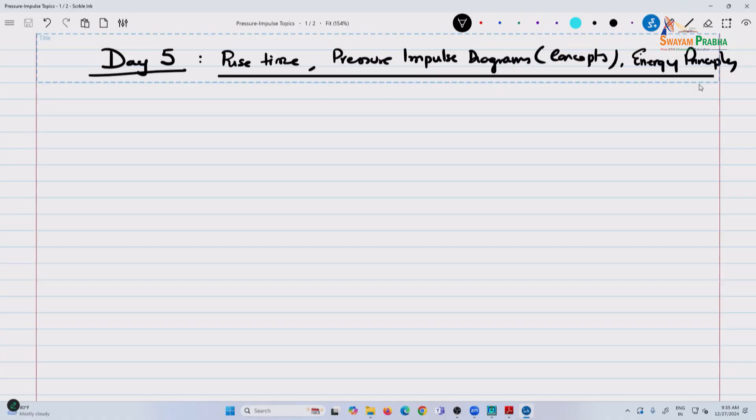Okay, goes by pretty quick. So we have a lot of different topics today. I put a few things, but there's nice concepts, some analytical work, things of that nature we'll present. The analysis varies from basic to all the way complex, and we'll cover all the spectrum, including calculations you have done, those are numerical. The differentiation between analytical, numerical, and advanced numerical - hand calculations numerical versus advanced numerical, finite elements. So all of that we will get exposed to, and today we'll look at some analytical information as well.

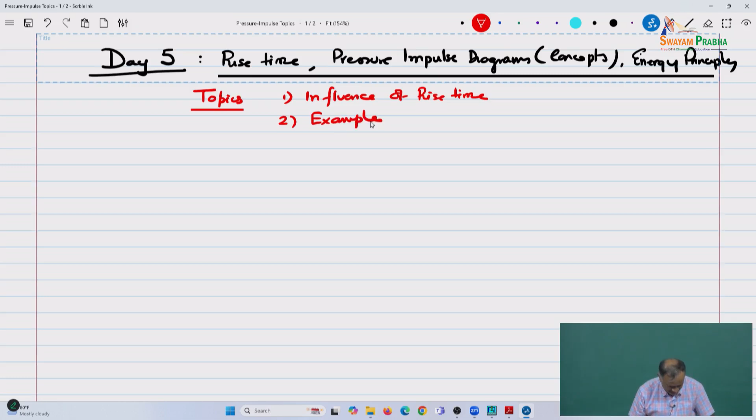Main topics planned today: the influence of rise time - I thought I had a graphic but don't seem to have that. Then we'll take up an example, and then we'll get into pressure impulse concepts and diagram. And also these are, I'd say, not energy, but sort of the Rayleigh-Ritz principles, impulse momentum Rayleigh-Ritz principles.

And then time permitting, we will look into nonlinear material aspects. So the plan is, hopefully we get through a lot of the basics today and Monday, the first session. Then we'll spend a couple of days on the analysis aspects of structures - how do you apply all of this to a real structure, elements. Then we'll cover the design aspects, the reverse - if you're given a certain loading, how do you come up with design, the design principles. And then we'll look into advanced concepts like progressive collapse, which I want to spend at least a session or two on, because it gives you an idea of what you do irrespective of the loading - there are ways to strengthen structures, design structures for that. And there's a lot of questions you've been asking, so I'm preparing some additional material, was preparing some last night. I have some more, so depending on how time goes, we'll address that later. So that's sort of the plan.

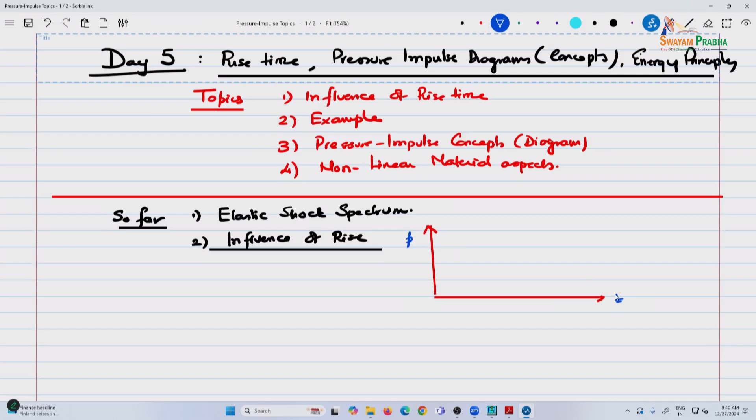Let's now look at the influence of the rise time. Most of the principles we have seen had zero rise time, but the rise time also plays an important role in these analyses. Again, these are analytical expressions. I will show some graphical representations as well, and we'll upload the documents in the Google Classroom. So you have P naught versus T. The influence of rise time is you have a rise and then perhaps a constant, or it could even be exponential. So let's start with the simplest basic case.

In the basic case, we had a constant P naught, here you have TR, and this is TD. So this is the applied load. When you are setting up the ordinary differential equation, you now have three components to it: x double dot plus omega n square x, and you have seen that we need to break these things up - we've seen how to break it up.

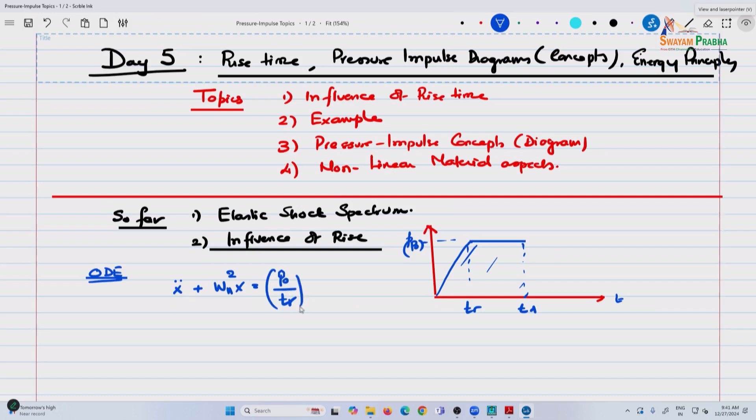Now this is equal to P naught divided by TR multiplied by T. This is for 0 less than T less than or equal to TR. And then this is equal to P naught for TR less than T less than or equal to TD. And then finally we have to set the last part up, because now you recognize that the response can be well after the load has passed as well, so it's important to set up a differential equation for that purpose.

And if you solve this, the basic solution is x is equal to delta static times T divided by TR minus sine of omega n T divided by omega n TR. This is for T less than or equal to TR.

Now it gets a little more complicated. This is equal to x of TR, that's the initial position at T equal to TR, cosine of omega n, T minus TR, plus the x dot of TR divided by omega n, sine of omega n T minus TR, plus delta st times 1 minus cosine omega n T minus TR. So that is three components. This is for TR less than T less than or equal to TD.

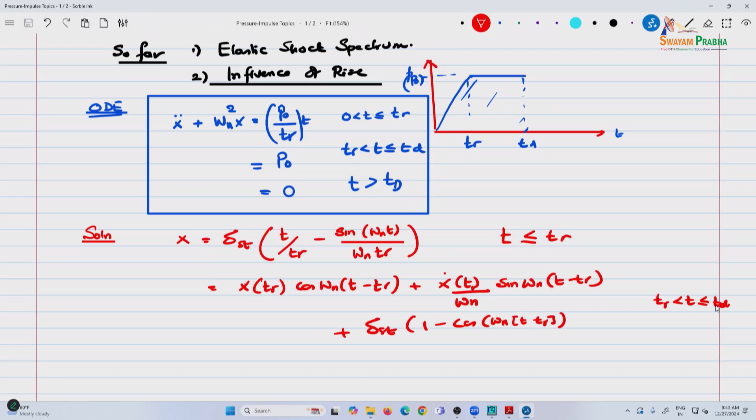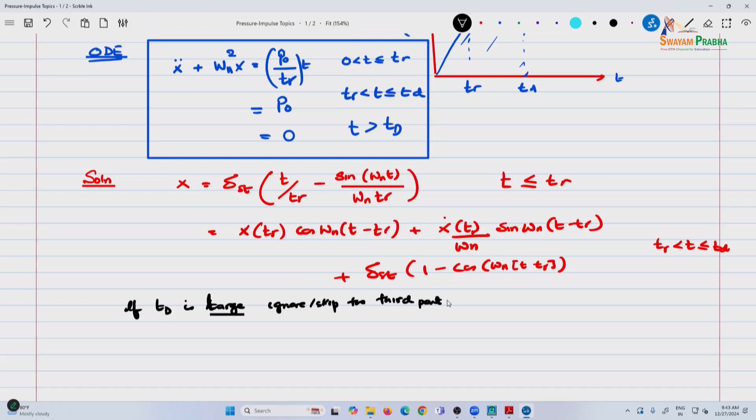We can assume TD is large, and there is also a component for T greater, but if we assume this is large, then we can ignore, or for now we'll skip the third part. This only applies under impulsive situations, and under impulsive situations you're likely to have the response well beyond TD. So here we are assuming the response comes within this range. In situations like this, one thing to note is it's quite likely where your TR is of the same magnitude as TD itself. In this situation, the deformation response is likely maximum - I'll just add that caveat - during the constant load phase.

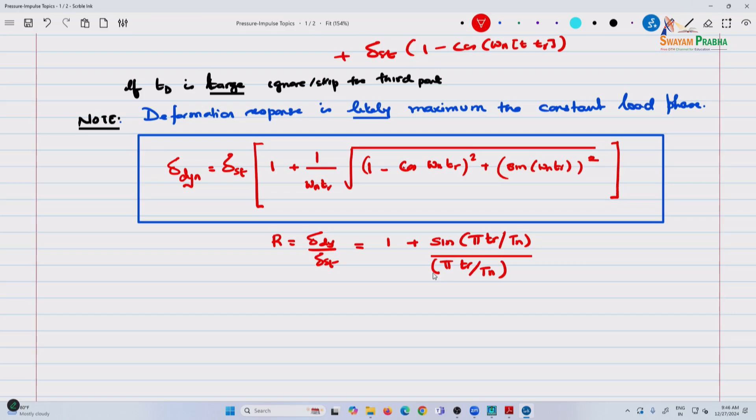So we can look at this. There are, I don't know if I have this graph, I should have printed this. So you can plot R as a function of TR over TN. I'll see if I can put this graph, it's not very clear.

Let's say your response is something like this. Let me plot a couple of them, at least the extremes. Or maybe 2 or 3 of them. If the response is something like this in all cases, those graphs will be better.

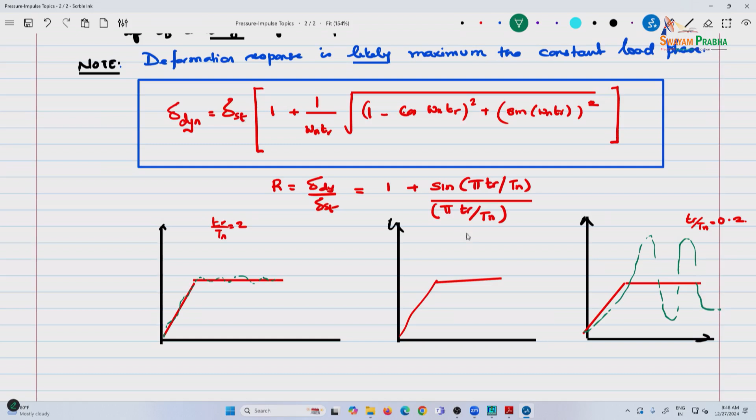So between extremes, if TR by TN equal to 0.2 versus TR by TN, let's say of 2, so your rise time is quite high. Then the response is likely to be more like this in this case, whereas here the response is likely to be more pronounced in this manner. And in between, if TR by TN equal to 1, the response is more.

So I'll give these types of graphs, I have one I'll upload in Google Classroom, but let's make a couple of notes that are helpful from all this. If TR by TN is less than a quarter, then the delta dynamic, this is the static response, the delta dynamic is likely to be twice delta static. This is a short rise time.

Now, however, as you see, this is short rise time, whereas this is large rise time. So if TR by TN is greater than 3, then delta dynamic is approximately delta static. This is for long rise time.

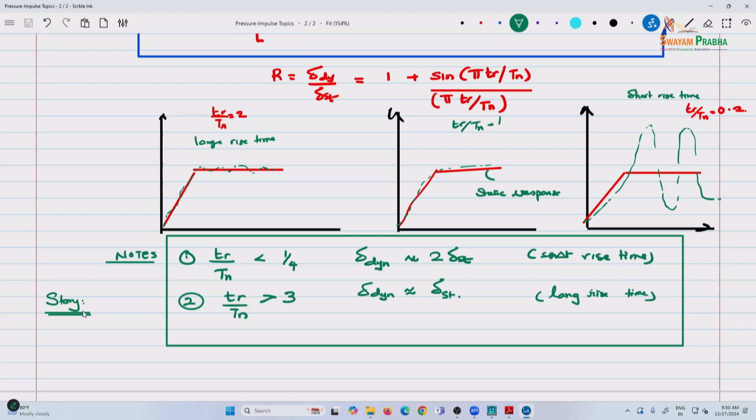But here you see the story is a little bit different depending on the rise time that you have. Again, for short rise times that assumption is valid, and then you can actually plot if you would like on your own. Let me add a couple of things for those of you especially who are interested to try on your own. In this time frame we cannot plot and make all these observations. We cannot do everything, although it would be best if we could and get more out of it. But you can see if you have the time, put into it, and you can plot and give some numbers and see how that thing goes.

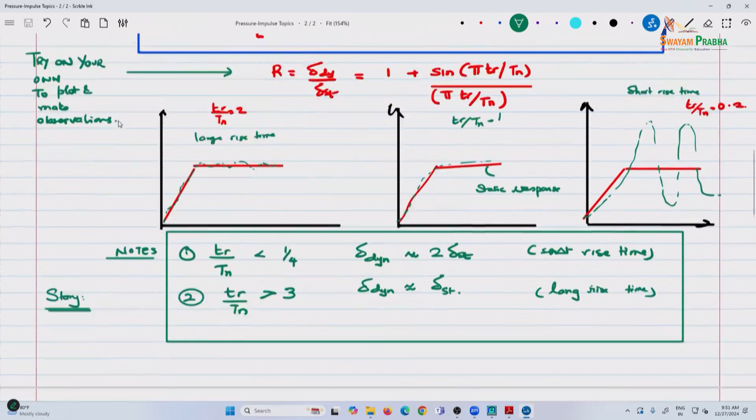So the general story is likely to be this, but of course it won't be exactly 2 times delta static. Then you're now looking at the elastic shock spectrum, right? Those values are lesser, so you're probably looking more up to 1.5, 1.6. Whereas the main story, if your rise time is very high, even in a triangular load, like if you have an up and down phase, then you're likely to be more in the second scenario.

And why is this, which application would this be? Some of the blast wall loads you saw, right? You plotted a bunch of those graphs. So an application would be...

There are several applications. One application would be: draw the P versus T for walls, and decide on deflection calculations based on this principle.

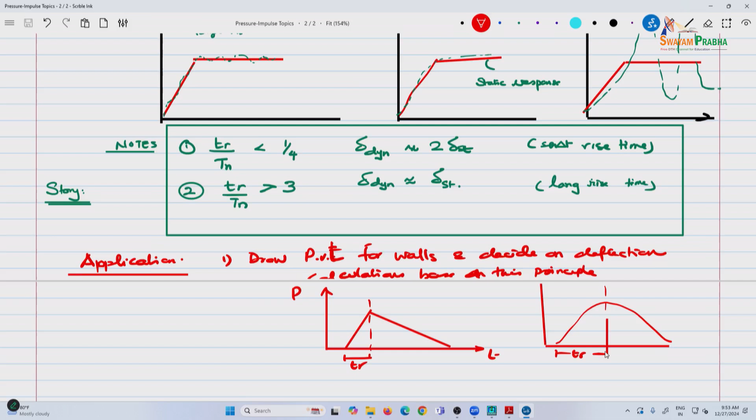At the end of the day, many of these are not direct answers. It's not a PL cube by 48 EI. You're never going to be accurate in these cases. Judgment plays a big role in all of this.

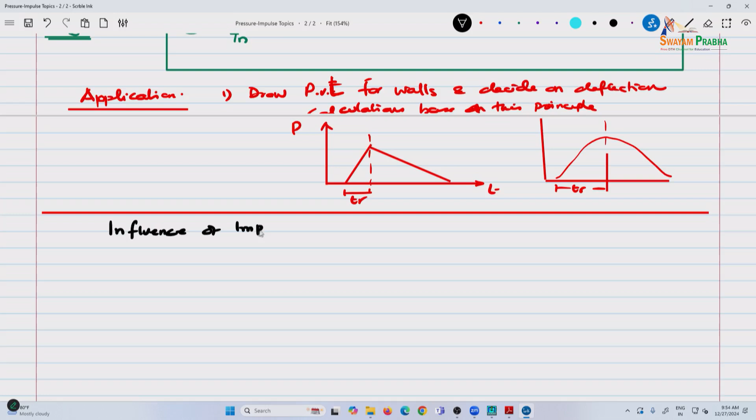Okay, now another concept I thought I'll present. I talked about it yesterday, but wanted to present the idea a little bit more in detail. We've seen what an impulsive load is, but now the influence of the impulse loading on the response.

Now, what is an impulse? It's nothing but if you have a pressure wave, something like this, you can consider the impulse is nothing but a short pulse. Let's say this is P naught and TD. So your impulse is P naught TD.

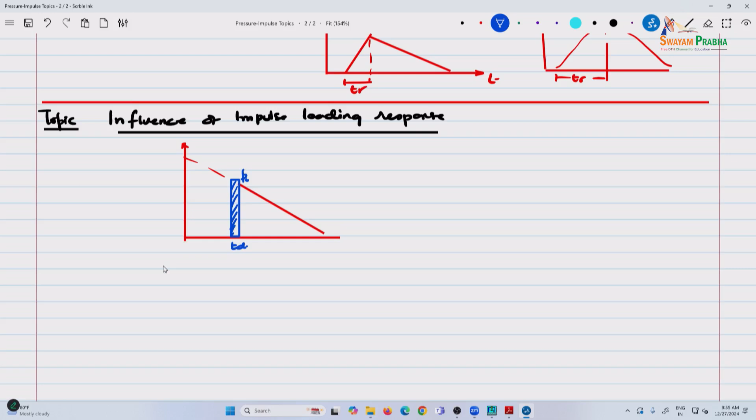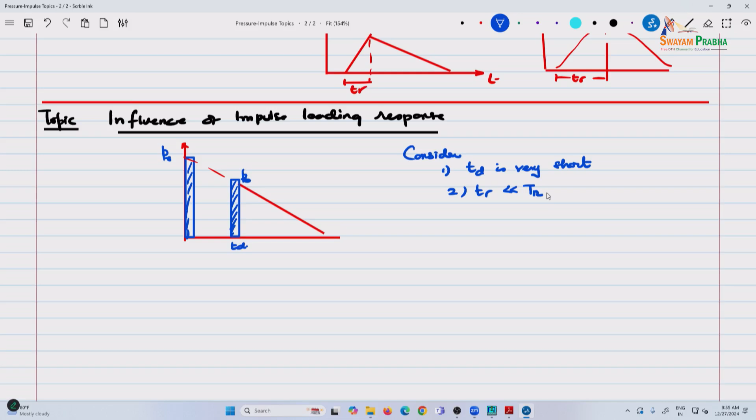Now let's consider two scenarios. One, TD is very short. Basically you don't have a triangular loading, the TD is basically right here. This is, let's say P, this is P naught. And secondly, the rise time is much lesser than Tn. So you do have an impulsive response.

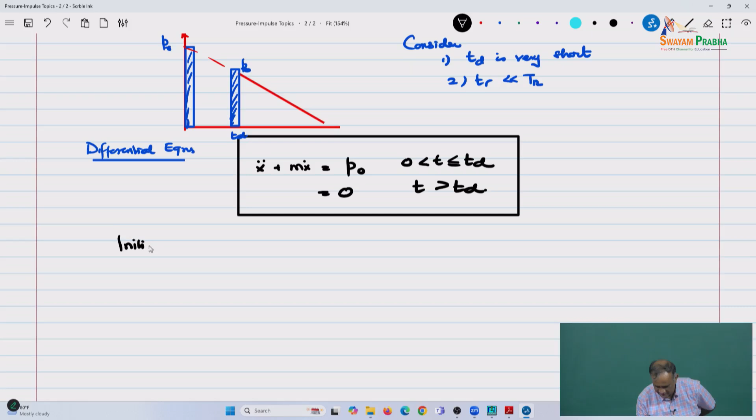Now if you look at the differential equations or the ODE, in this case you have x double dot plus mx dot is equal to P naught for 0 less than T less than or equal to TD, and this is equal to 0 for T greater than TD. So these are the two, and you have initial conditions. It's an initial value problem. So the initial conditions are: one, x of t equal to 0; and secondly, x dot at t equal to 0 equal to 0.

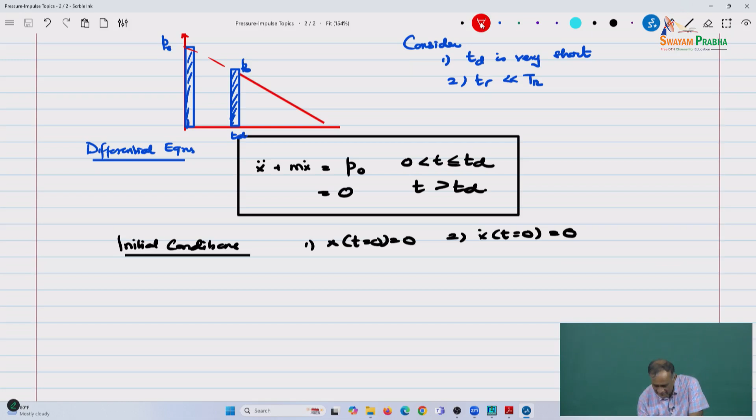So I want to introduce the concept of, there are two principles. One is kinetic energy and the energy principles, and the other is what you've all read at some point, impulse-momentum principle. So the first one is work-done energy principles, the second is impulse-momentum, right. So impulse and momentum, they both go together. So using impulse momentum principles...

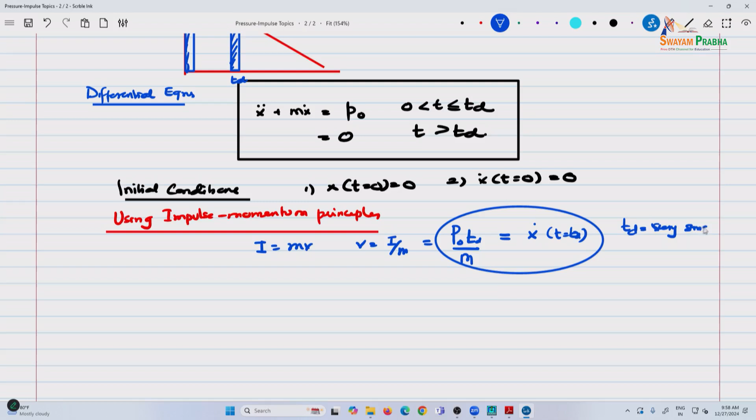Now, I is equal to mv. So therefore V is equal to I over m, which is, now I here is P naught multiplied by TD. It's, remember, it's very short, we have given those things. This is P naught multiplied by TD divided by m. So this is the velocity at t equal to 0, or at t equal to TD, but again those are very small. So if we assume that since t equal to TD is very small, we assume that the momentum is applied and instantly it becomes the velocity.

So when we solve the differential equations, we have here x again is equal to A cosine omega n t plus B sine omega n t, and x dot is equal to minus A omega n sine omega n t plus B omega n cosine omega n t. So you have these two. So solving and applying these two, so you have this condition applied and this condition applied. So this is IC1, let us say this is IC2. Again, we are understanding the principles out here. What you get is x, applying the ICs.

Now especially let me show you the second one. The first one, so you apply, for example, at x dot is equal to B at t equal to 0, x dot is equal to B omega n multiplied by 1 is equal to I by m. P naught TD by m is I by m. So from here you get B is equal to I divided by omega n m. And applying the first principle, A goes to 0. So at x of t equal to 0 gives A equal to 0. So this gives you a very nice expression.

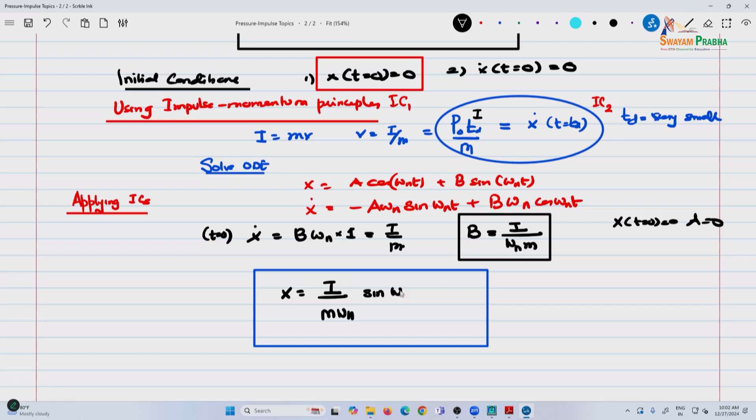Now, in blast loading, again we are not going to solve this, but presenting the idea. In blast loading, let's say we go to a triangular approximation.

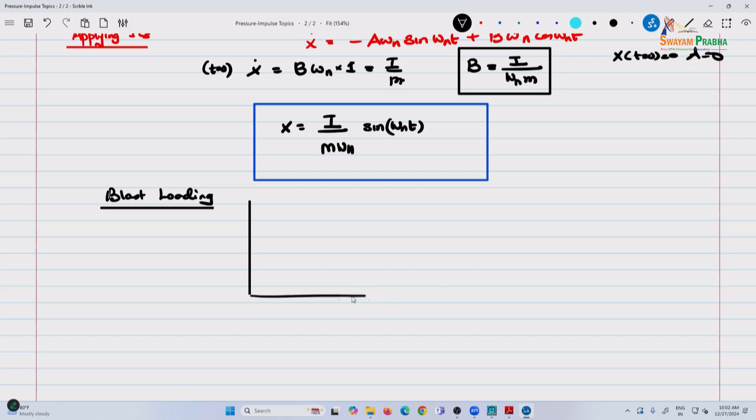So this is your P naught, P versus T. You can think of two different things. Here you see there are two time variables. Now let's say you are analyzing here, this is dt, and this curve is P naught multiplied by 1. So one of the time variables here is t. If you are integrating for area, you would say t dt and go about it.

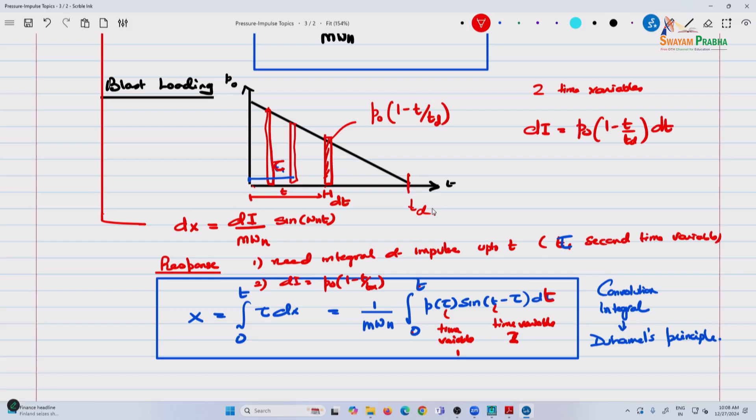So these are some more complexities that you get into, and if you are interested, numerically, when you look at some of the codes, nonlinear and other such things, how do they develop? They go through these principles, apply numerical integration techniques instead of analytical expression techniques, and if you're interested, it's all fascinating stuff, but work has already been done. So many of it is readily available.

Any questions so far?

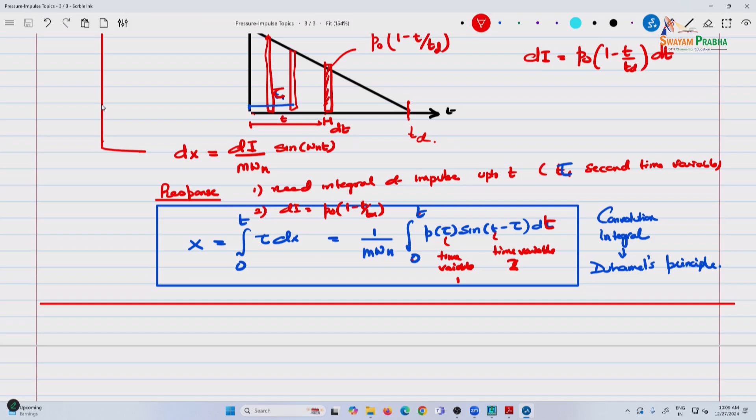So that's where the shock spectrum, let me push this again, import file. I showed a little bit, we've seen that yesterday. So the shock spectrum development for various kinds of curves you can come up with using these types of principles.

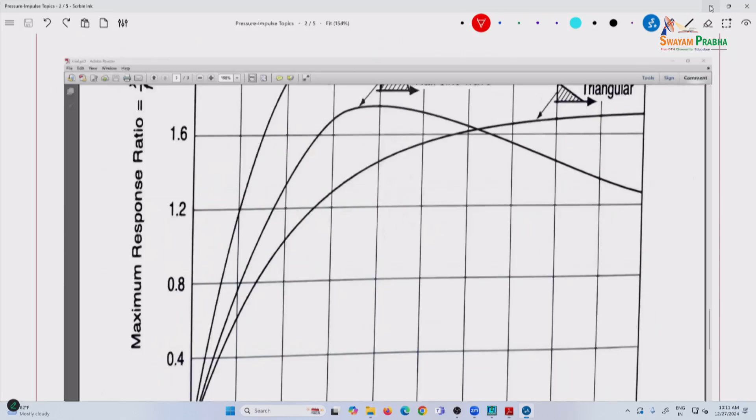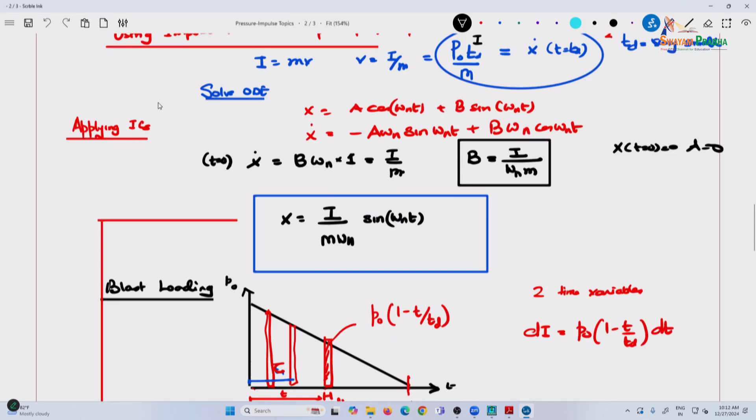So let's take an example. Let me put that shock spectrum anyway. I think we may still have it here. So it is there, at least we have that part. Let me see if that shock spectrum showed up. I think it is there, it's just not visible. Yeah, you see it is here. Oh, open this again. Oh no, that was yesterday's. So browse. I think we didn't save today's. Huh? We may not have, I think. Well, at least we've stored it. So this is day 4. Browse. Yeah, I don't, below that. Oh, this one, right? Yeah. Okay, good, good. Okay, yeah.

So let's take a simple example. This is an SDOF type analysis where you have a structure, a steel structure in particular.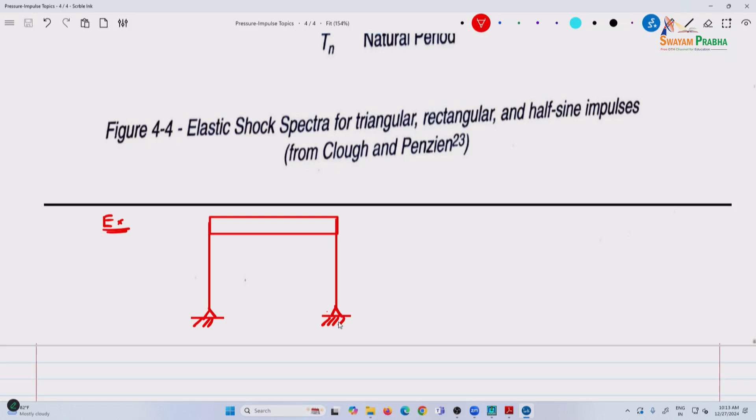And I know many of you, or all of you, are not familiar with the units. The best thing I would suggest is, especially if you're using FPS units, select a set of units and keep consistent with that. So either you can use kips, inches and second, or pound, inches and second. When you convert for analysis, if we're calculating static deflections, feet is a better unit, then convert feet to inches for further analysis. So hopefully now you're multiplying and the numbers will look good and you won't be spending.

Understanding the significance might take a little while, or you can apply them to your own problem. I found the UFC 3-340-02 figures in SI units, KPA - the same exact figures, the Kingery-Bulmash expressions for figures 27 and 215. We'll share that also. I found it this morning.

So the height here is 12 feet, and this is rigid. It's given that the weight of the floor is equal to 8.5 kips. The two columns are oriented in this manner, and they are W24 by 85 - 24 inches deep and 85 pounds per foot.

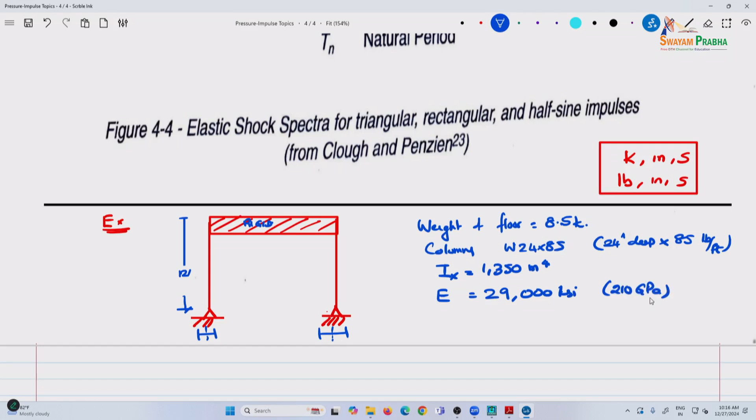If you are to get an idea of that. So the question is: for PR equal to 20 psi, TD equal to 20 milliseconds, TD equal to 60 milliseconds, find the elastic dynamic displacement.

The screen, this Wacom tablet is really nice. I'm tempted to now go back and order this, but it's hard to carry around. You have to fix it in one place. A smaller version is good, yeah.

So let's start with - it's a triangular load, a triangular pulse.

First step is the data and the dynamic structural properties. So you have static structural properties such as inertia, area, length, but its dynamic structural properties - this is structural, not static. So dynamic structural properties.

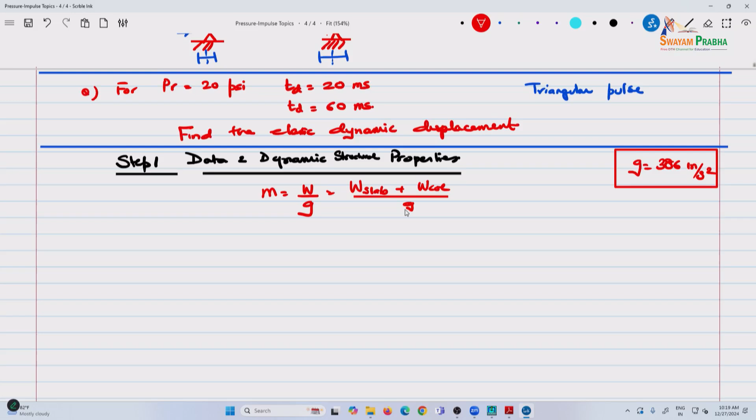It's also given that the floor weight is 8.5 kips, and clearly you can include the floor weight. The wall is something you have to decide, only if it is integral and acting with the system.

Going through this, you have the slab is 8,500 pounds plus two columns - W24 by 55, so 2 times 55 pounds per foot multiplied by 12 feet, divided by 386.4 inches per second squared. So all you have is pounds here. The unit is called a slug - have you seen a worm slug? Do you know it's a worm? Doesn't look very good, so that word itself gives me a yuck. So 25 pound-second-squared per inch.

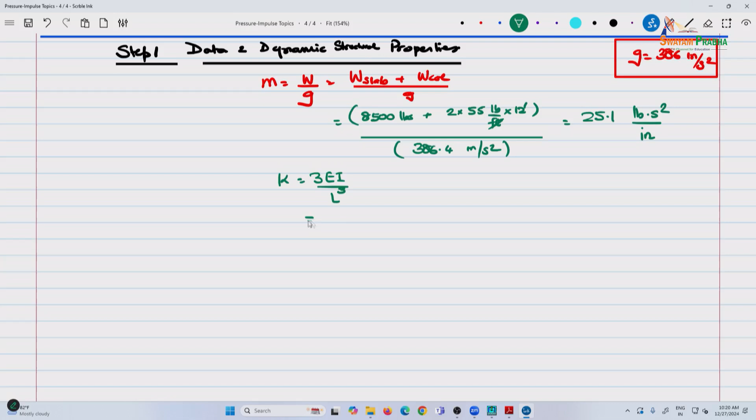And K is, in this case, 3EI by L cubed, because it's PL cubed by 3EI. So 3 times 30,000 KSI, kips - this is 1350, there are 2 columns, divided by length which is 12. So the stiffness value is 81.3.

And so omega n is the square root of K by M, being consistent with the units: 81.3 multiplied by 1000 divided by 25.1. Many times my students in class complain I write too fast - am I writing too fast, or is it okay?

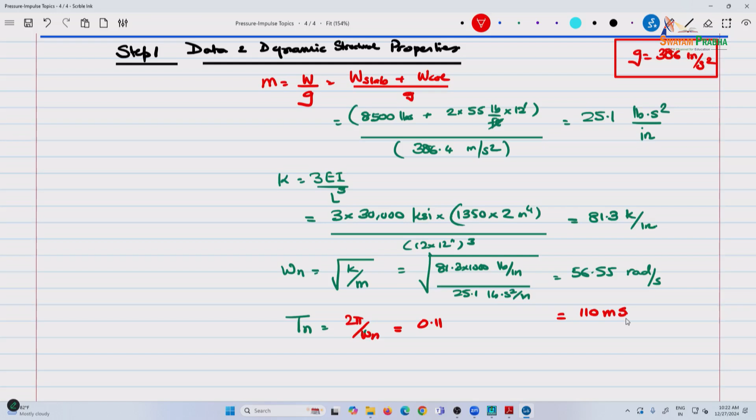And then the natural time period is 2 pi by omega n, and so this is 0.11, or 110 milliseconds - notice the numbers also. Single story structures are in the range of 50 to 100, 100 to 200 milliseconds, and this is a significant amount of load - yesterday we also saw a couple of examples. You can simplify multi-story structures if you're working with non-structural building components subjected to loads - you can convert that to an equivalent system like this and perform analysis.

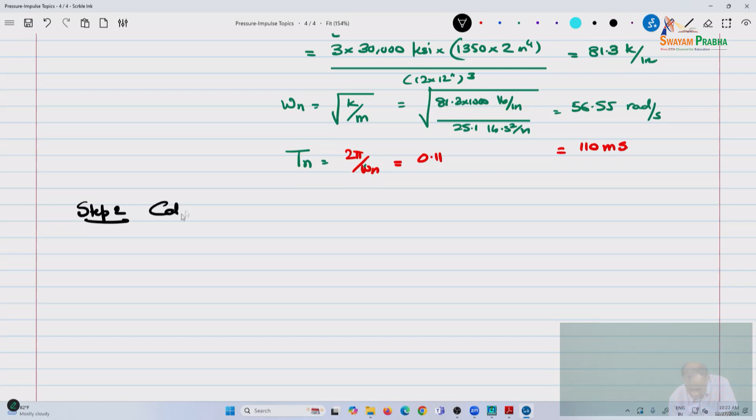So the next step is to calculate the load on the structure and the static deflection. We are looking at the SDOF system like this. So the SDOF identified is this deflection at the top.

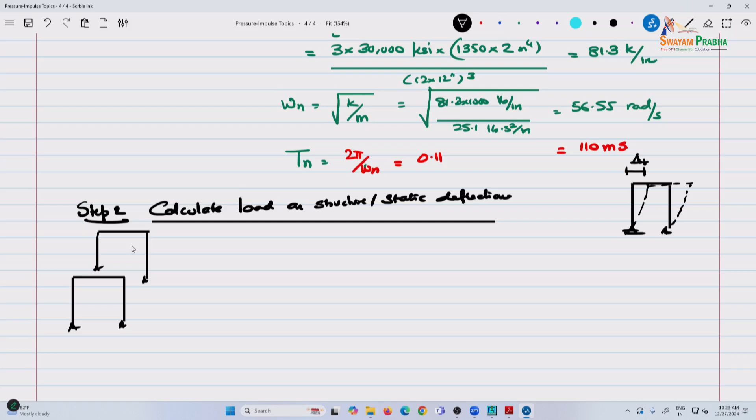Let's assume that these frames are - so this is 20 feet center to center. Some people might say I'll take half the load. So let's say this is the blast, this is 12 feet, so the bottom 6 goes to the base, the top part of it - so this could be the tributary width, or those are again judgments you make. So what you have here is P naught is 20 psi - is that the, what is the 20 psi?

In all my classes there's usually one person who's running the calculator, finding out any error, which is good. At least he or she keeps engaged during the class. And some figuring out who that person is in this group.

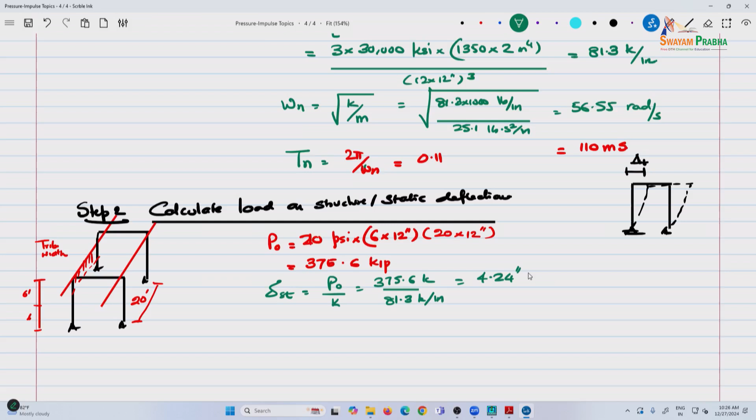Then the third step is, this is actually an easy process to calculate the dynamic deflection. This is from the elastic shock spectrum that we just imported.

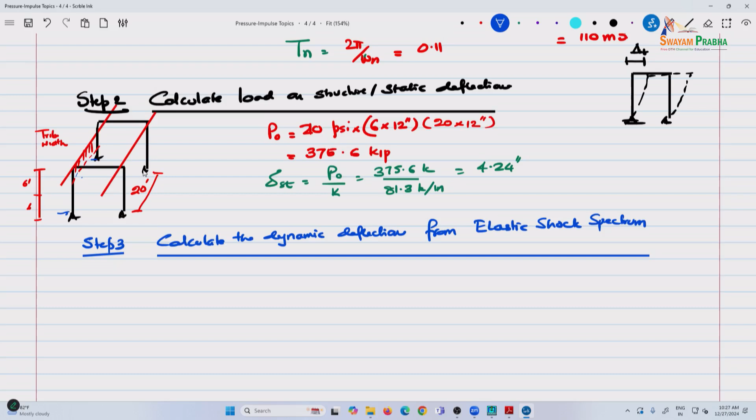Why did I take which one? Oh, this tributary width. Oh, the other half goes at the bottom. Or you can take full also, if you have put your structure in a way that it's supported. Even if you have a floor beam going across, that beam will probably send the loads to the base.

No, the wall is, you will have walls, right? Yeah, so maybe I should have mentioned that. You will have walls between frames spaced 20 feet apart.

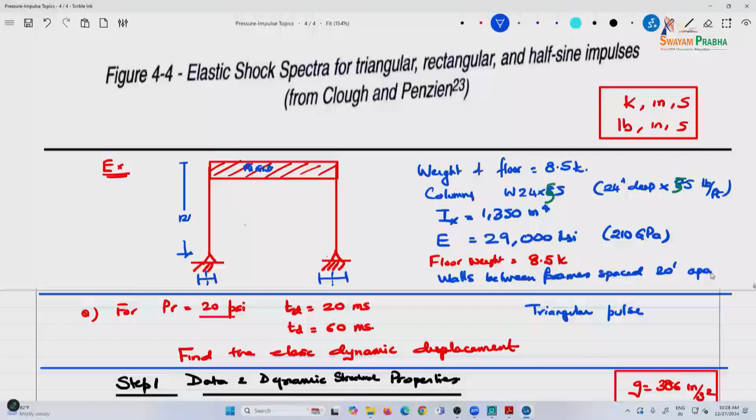So we look at TD for TD equal to 20 milliseconds. TD by Tn is 20 ms divided by 110 milliseconds. So this is 0.19.

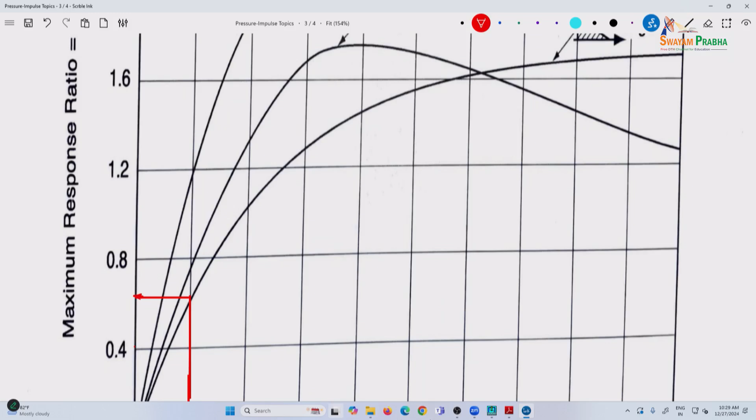Surprisingly this process is so straightforward. So 0.19 impulse duration to natural time period, so that's roughly right here, and going up to the first curve, and we come, so roughly 0.46, 0.65 or something like that. So here if you notice...

So you get delta dynamic by delta static equal to 0.65, or 0.7, from the ESS - let's call this ESS. So delta dynamic is actually lesser than, I don't know how much this is, 60% of 4.24.

So the wall in most cases, even in seismic analysis, the wall is considered a mass, but it provides stiffness only if the blast load is in the direction of the wall. Not here - the blast load is perpendicular to the direction of the wall. So the stiffness it provides can be neglected. And it's a very fair, very reasonable assumption.

20 feet center to center, yes. Because see, the pressure load is coming - this is the wall and this is a column in between, right? So the pressure load that is coming is resisted by the column. So the frame is taking the pressure load there, only half the height. So what is this number? 0.65 times 4.24.

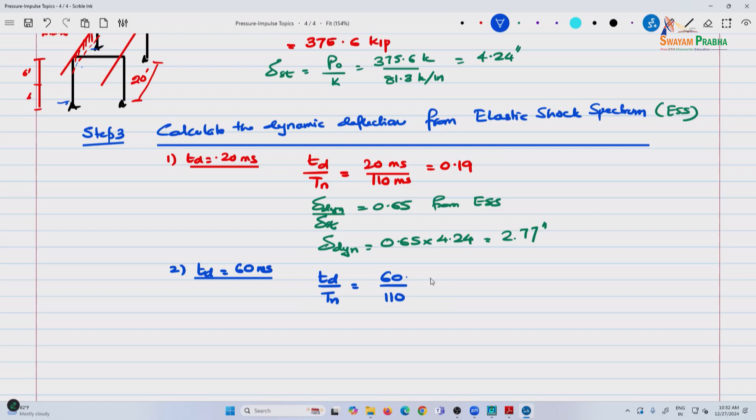But if you look at now TD equal to 60 milliseconds, so now TD by Tn is 60 by 110. So this is 0.54.

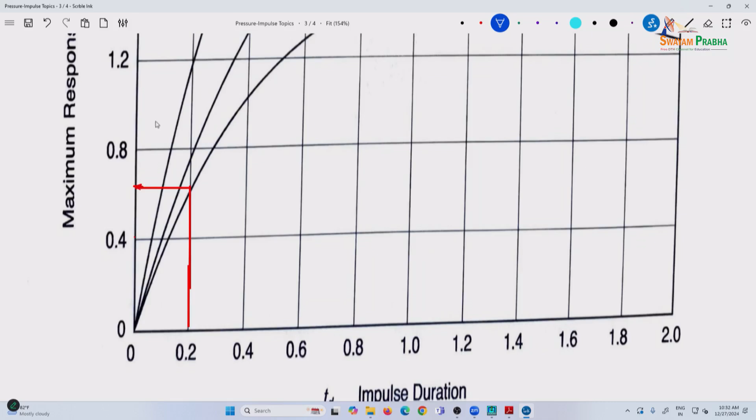Yeah, right, it should be. So the spectrum - if you look at the spectrum, up to a certain impulse duration - and yesterday, remember, we saw those equations, right? Those equations, these are elastic behavior. So while we say it is delta dynamic, it hasn't had the time to go past static. That's what it means here. So even though you're giving an impulse, that impulse is not sufficient.

It's like you're trying to jump, but you haven't done enough impulse to jump. For me to jump, I have to give more impulse. So it's in the lower phase.

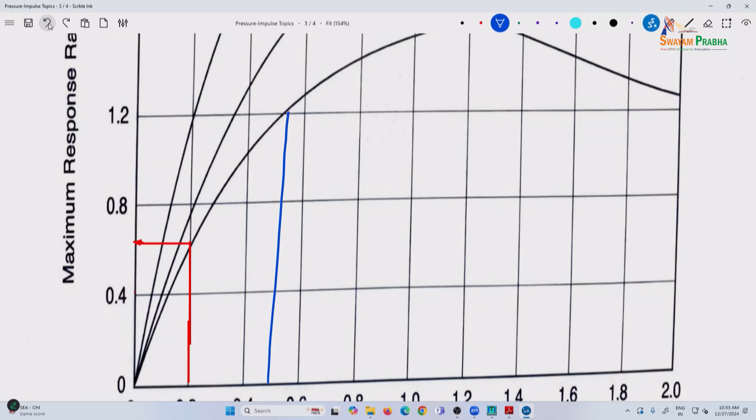Second one is Td by Tn is 0.54. So that's somewhere, let's say here. Well, actually, probably not that. It'll be - I don't know what I'm doing. So 0.54 going to the triangular curve, somewhere here, and let's say 1.3 or 1.25, whatever you want to pick.

So R is equal to 1.25 - again, help me with this. Delta dynamic is 1.25 multiplied by 4.24, that's 5 point...

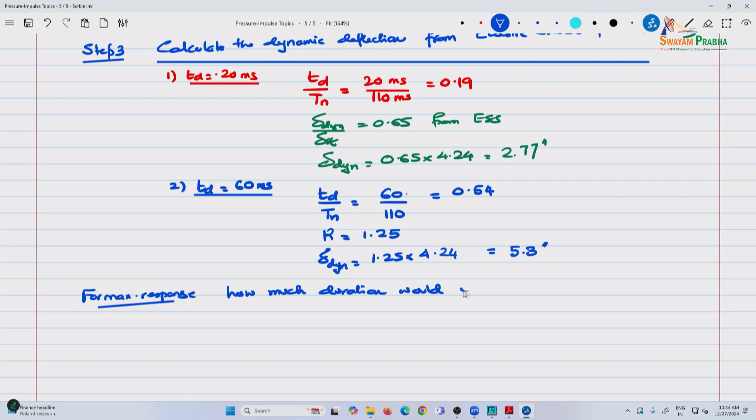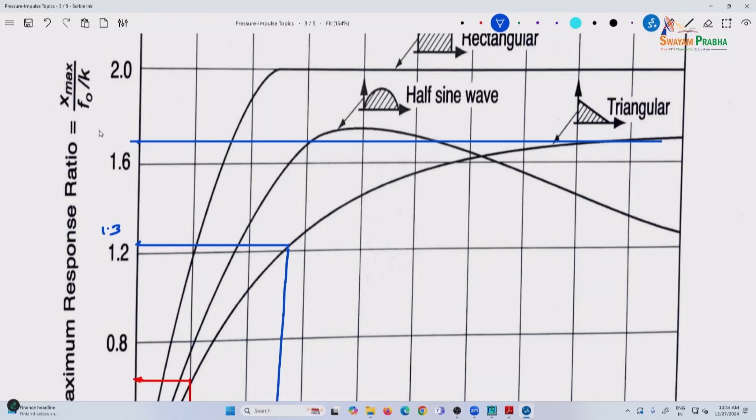And for maximum response, how much duration would you need? Let's just look at that. So the maximum response in this case is somewhere, it's plateauing somewhere here. So let's say this is 1.7. And if that's 1.7, you're looking at almost this coming down, Td by Tn of 1.8. So for maximum response, R is equal to 1.7, Td by Tn is 1.8. So Td is equal to 1.8 multiplied by 110, that is 198.

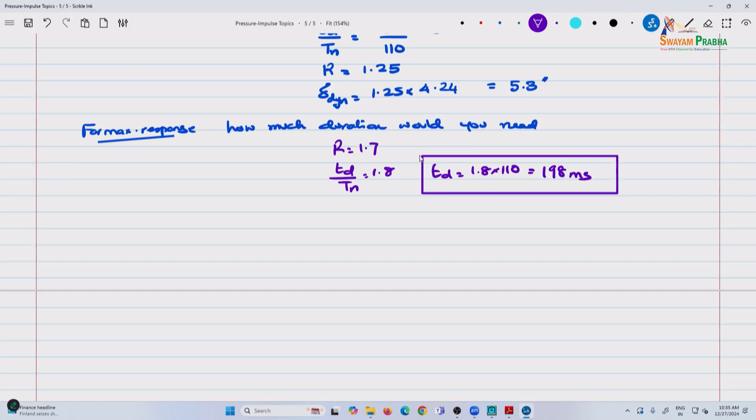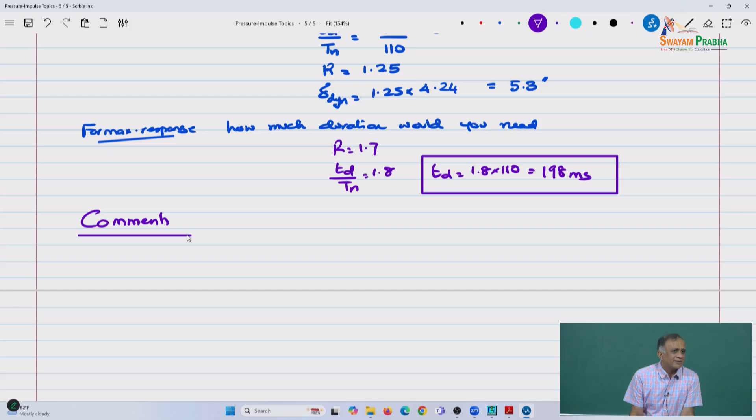So general comments again - after a movie, what do you do when you come out? What do you do? Review. This was good, that was not good, right? Who doesn't do that - postmortem. So after watching this movie, now you review.

So what would you say as stiffness goes up? Think about it - this is just a moment to reflect.

Say, for a given Td, small Td, Td by Tn. So, just an exercise.

What happens to omega n as stiffness goes up? Stiffness goes up, omega n increases. So, let that settle in. And then what happens to Tn?

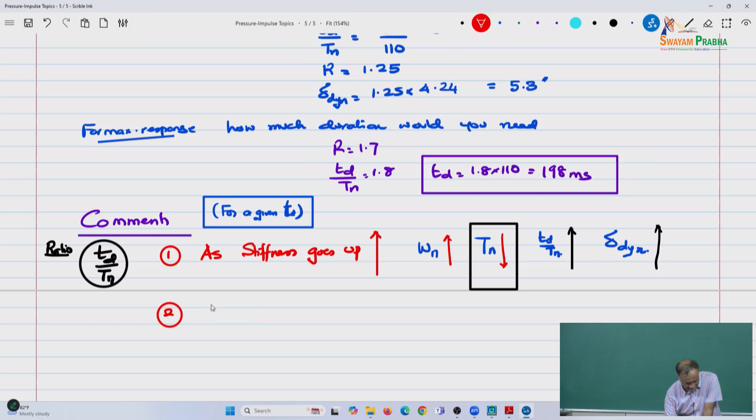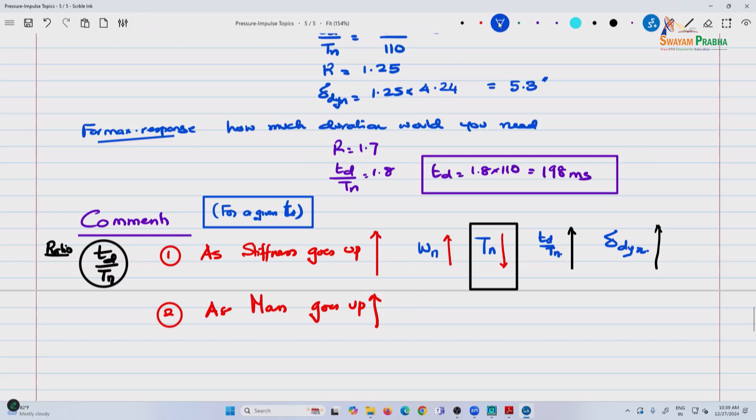So, that's the stiffness effect. Second is mass effect. Omega n, Tn, Td by Tn. What happens to mass? Omega decreases. Tn goes up. Td by Tn

goes down. Delta dynamic decreases, right? See, this is significant. Remember, that's why we talked about mass being a very important aspect. But at the same time, stiffness is also too. Reducing stiffness does help too.

So, you have to make those adjustments when you're actually designing structures to resist blast. It is how do you, what would you have to pay attention between, if you were designing to include that wall with the column? When you're designing, you're sending out some drawings, what's the attention you would focus on now?

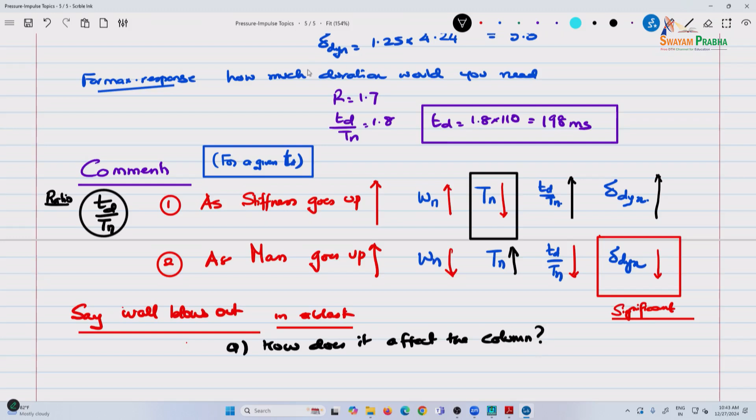In a blast, but not the column. So how does it, question is, how does it affect? So this, as they say, is out of syllabus, not in my notes. Affect the column. What do you think? We don't need to get quantitative numbers. Just look at this chart of this sets of red and black arrows, and

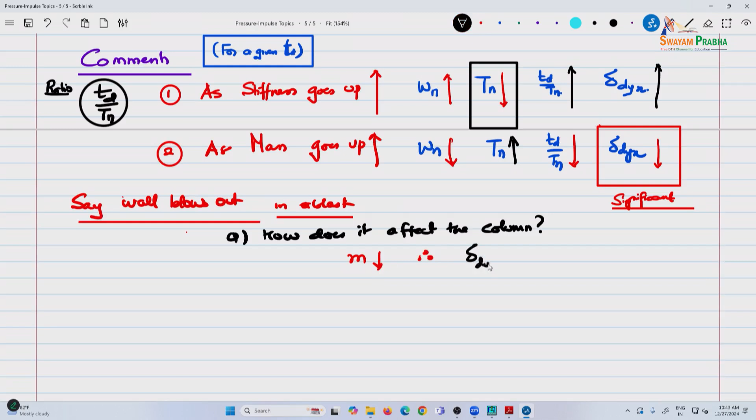so clearly mass is going down, right? So your delta dynamic is going to go up, down. Let's look at a number also. Mass goes down, so therefore your delta dynamic goes up. So it makes it even worse.

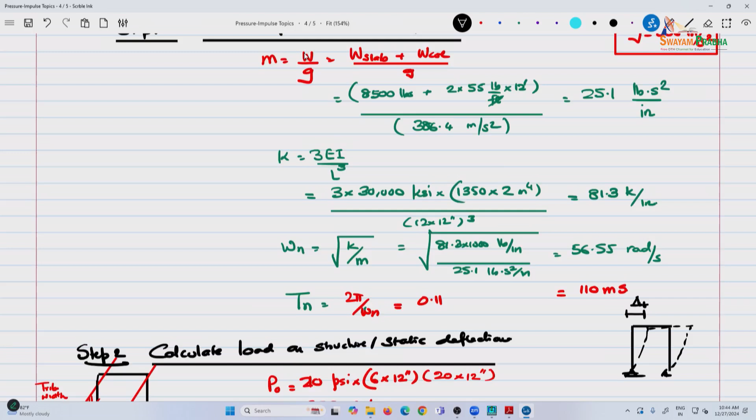Now let's quickly look at the omega n is square root of the stiffness still remains the same. So omega, mass is 2 times 55 times 12. So now the mass is 2 times 55 times 12 divided by 386.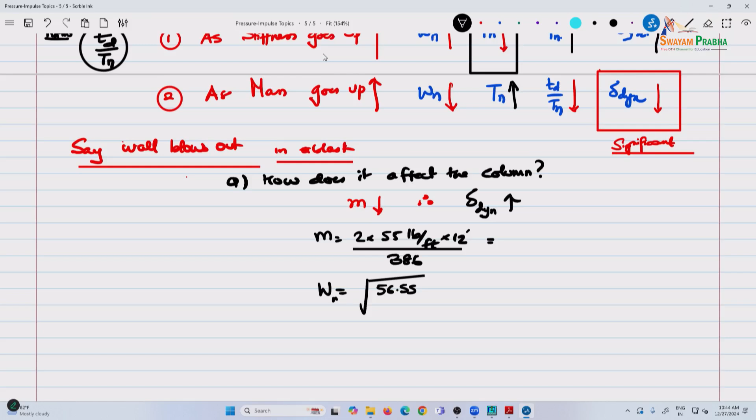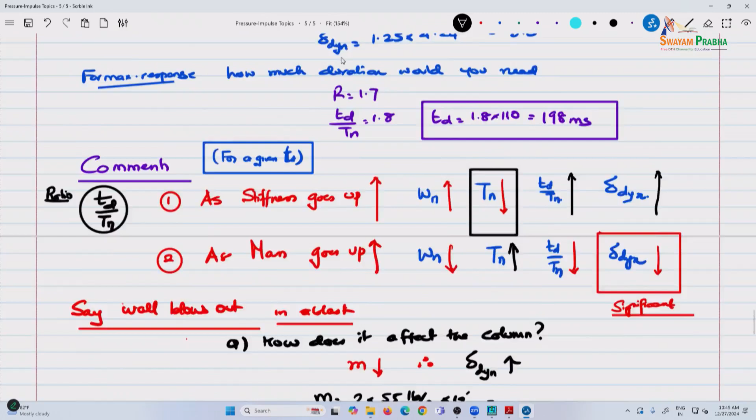How much is this? And omega is square root of k, which is 56.55. Times 1000. Wait, k is 81.3, sorry. So 81.3 times 1000. How much was this number? 3.42.

How much is this? 154 for the first case, omega n, and Tn, 40. What was it before? 110.

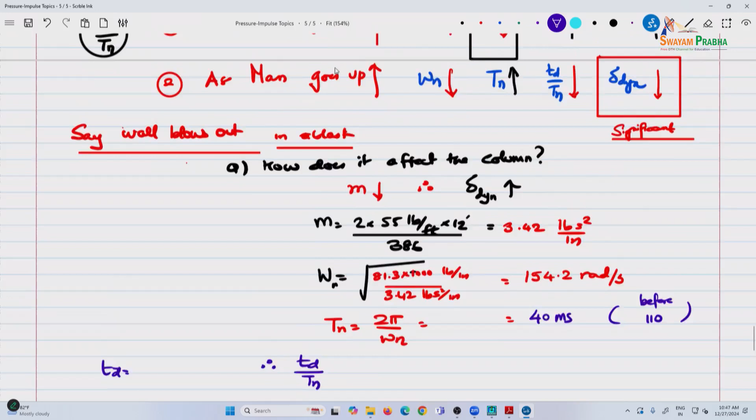So now, see, we're going to answer your question. How fortuitous, coincidental. So now, therefore, Td by Tn, and let's say Td is equal to, what was the second number we looked at? 50 milliseconds or 60? So Td is equal to 60 milliseconds. So this is 60. I think I was expecting a question, so we went with this.

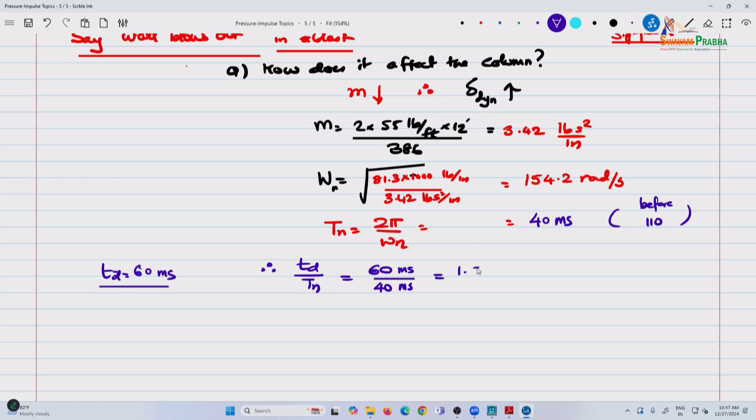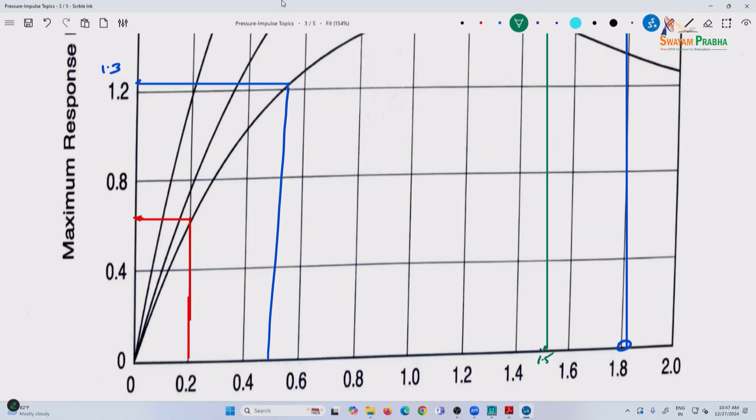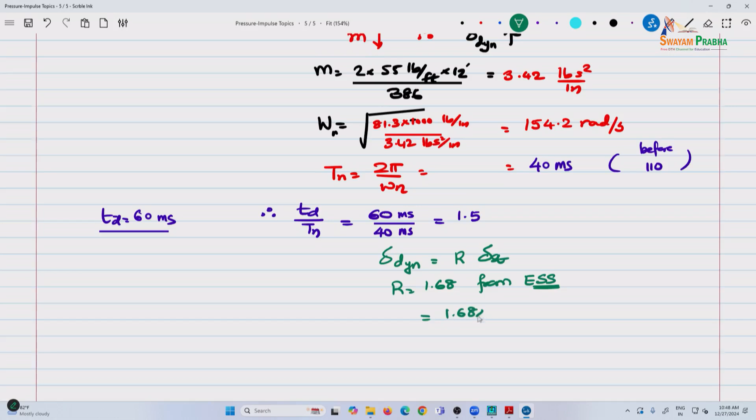Not really. So this is 1.5. So to answer Raghav's question, if we go 1.5 here, going all the way, somewhere, let's say 1.5. So now, and so when you're presenting, so this is 1.68, let's say. So your delta dynamic is R times delta static. R is equal to 1.68 from the elastic shock spectrum. So this is 1.68 multiplied by 4.24. How much is that? How much? 4.24, right?

How much is this? So, what will you have in your report?

Report: delta static is 4.24. Delta dynamic is, how much was it? 5.3. See, it's a simple problem, but so many things come out of it.

With wall, delta dynamic is 7.12 with blowout of wall.

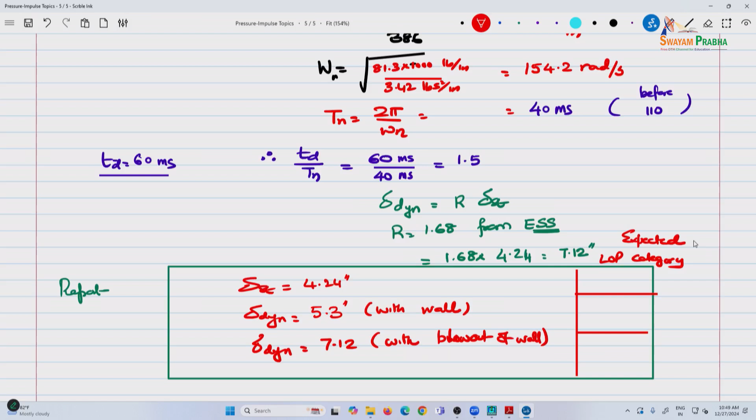And what you can do is, you can also say LOP category - for this case, expected level of protection category. Now, how will the levels of protection be? So, for example, this is steel.

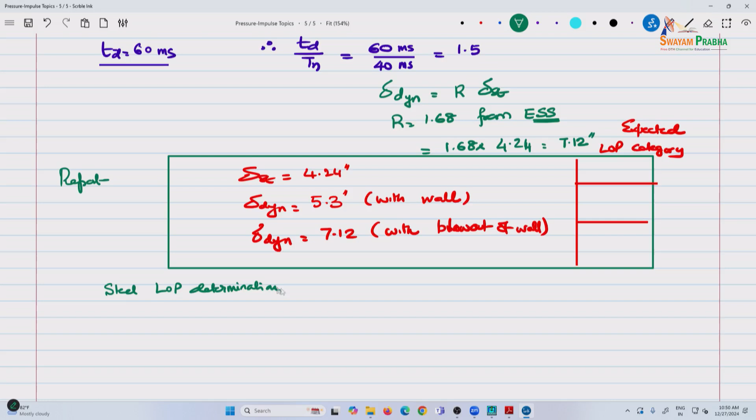Although you have a concrete, but the primary structural element that is resisting is steel. You have a wall, but none of those are resisting. The resistance is provided by steel. So what do you do is, we know it's going to deform like this.

And if this is your delta, this is L, we take a triangular shape. So for ductility demand, mu is delta over L.

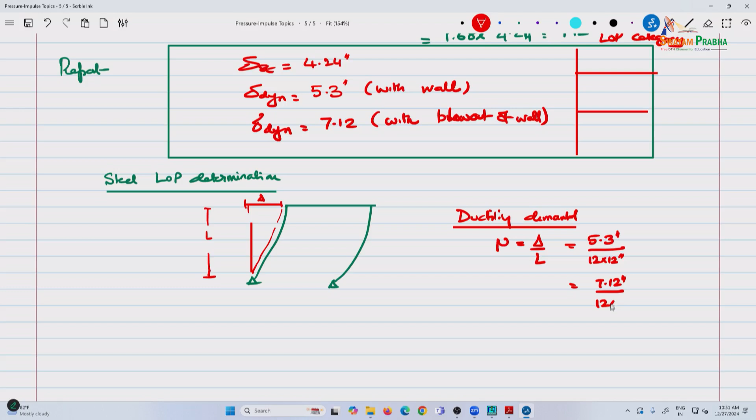So which is, what are these two values? 5.3 inches by 12 times 12 inches, or 7.12 inches by, help me with these numbers, or support rotation.

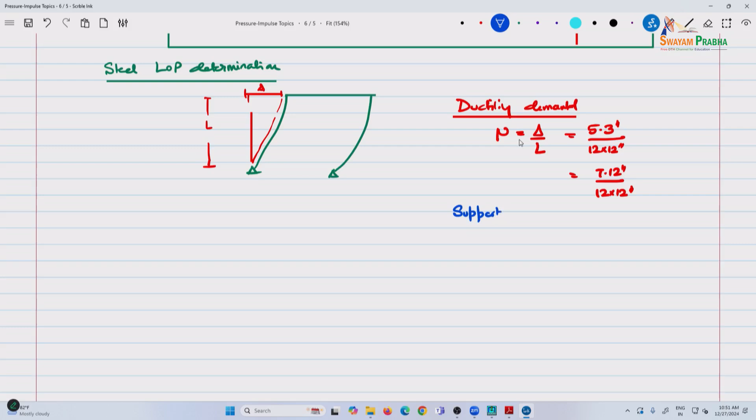No, this is support rotation, sorry. So this is theta, because tan theta is approximately, theta is delta by L. So this is your support rotation.

Now, if you want to see, just let's say you don't have too much other information and you want to get a gauge - okay, is this too much, right? Is it too little? You know it's going 2.83, that's a lot. You know, a 100-story building, how much does it deflect under wind?

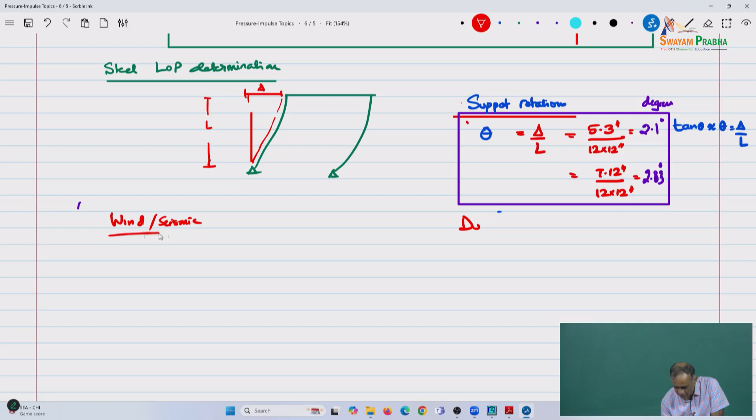500? So H by 500, 300, 500, something in that range. So what is H by 500 here? So under wind or seismic, as they call the drift ratio, is - he said H by 500, I say H by 300. I think, I don't know, maybe Indian codes is 500. We commonly use 300. So this is 12 feet.

How much is this? Clearly less than 1. 0.48 or 0.5. So clearly we are way over in a scenario like this.

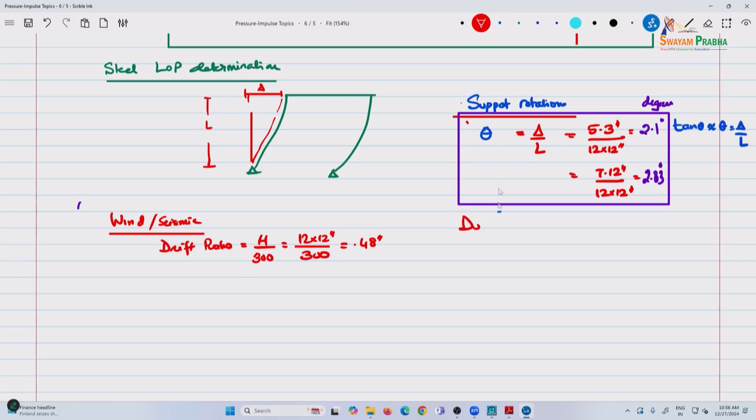The ASCE 5911, for example, that I mentioned, or 5922, documents like that, they have limits on - I'll bring that number to see if this is. So from here, we'll stop with. So from here, we decide

the level of protection. So you can go back and say that the level of protection has dropped from, or it went up from medium to low. So that's why it's dropped. It's gone down if there is a blast wall blowout. So those are assessments that are made.

Nice, interesting material that we'll go through.